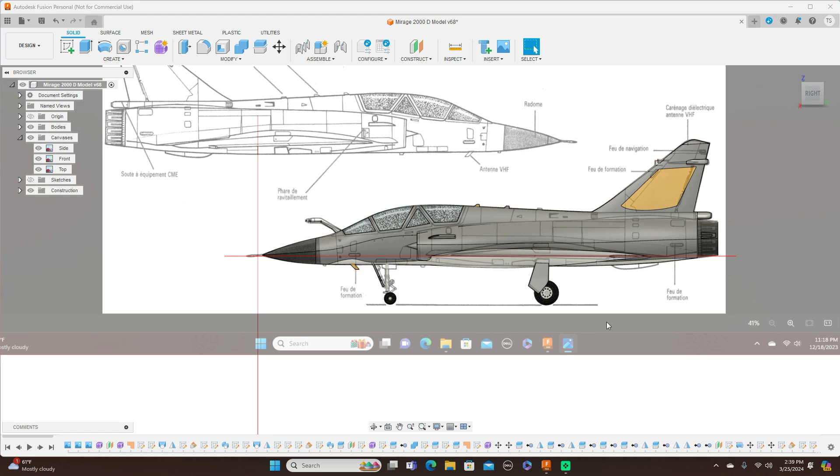Today we're going to look at modeling this Mirage 2000. So we'll have a quick look at her. Go ahead and turn the canvases off. This is what she looks like.

Yeah, the top view there. Front view.

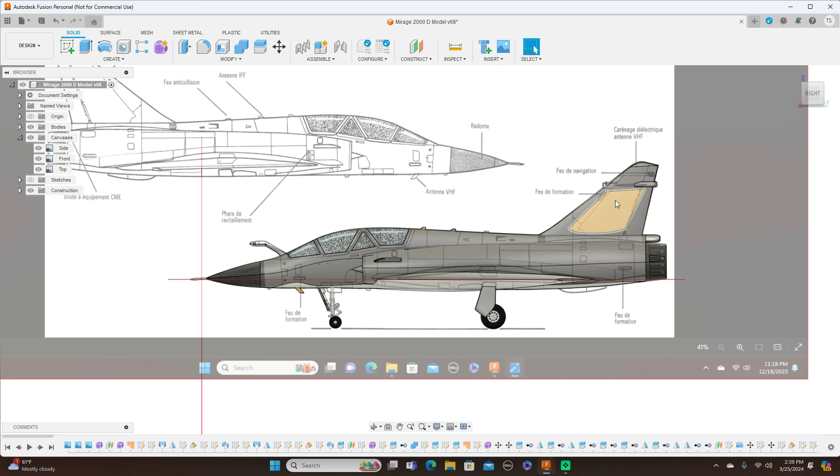All right, let's go ahead and get started here. Come up here, new design, and I'm going to bring in some pictures here of the Mirage.

Come up to insert, canvas, insert from my computer, and it's this one here. So I click this and open, and this is going to be the side. So I click on this plane here. I drag this out, and this is going to be the side view. And click OK.

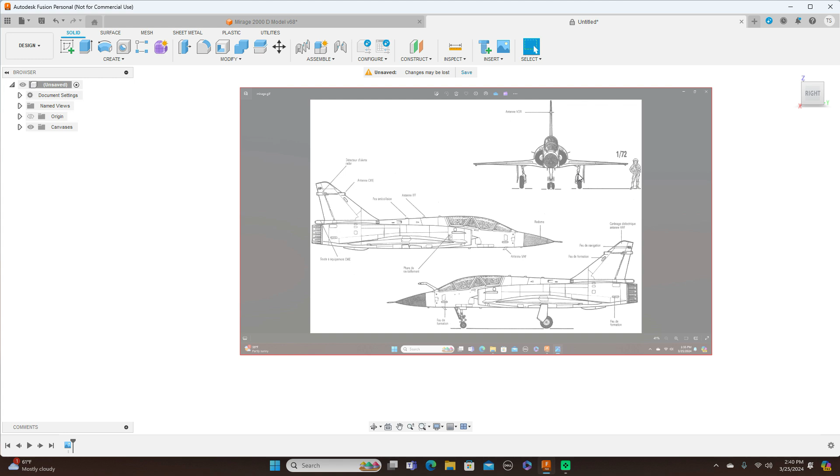Next, I'm going to bring in a top view. Well, let me do one thing first. I'm going to just go ahead and calibrate this to scale it and center it up, then bring in the next one. So come over here. I'm going to change the name of this to side.

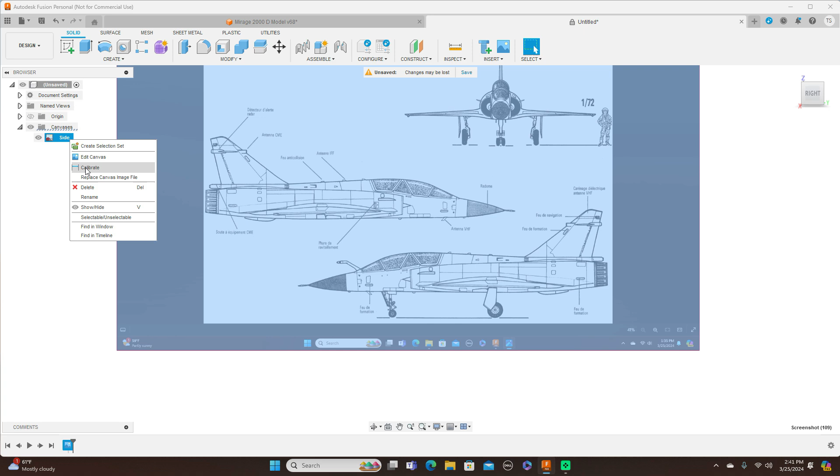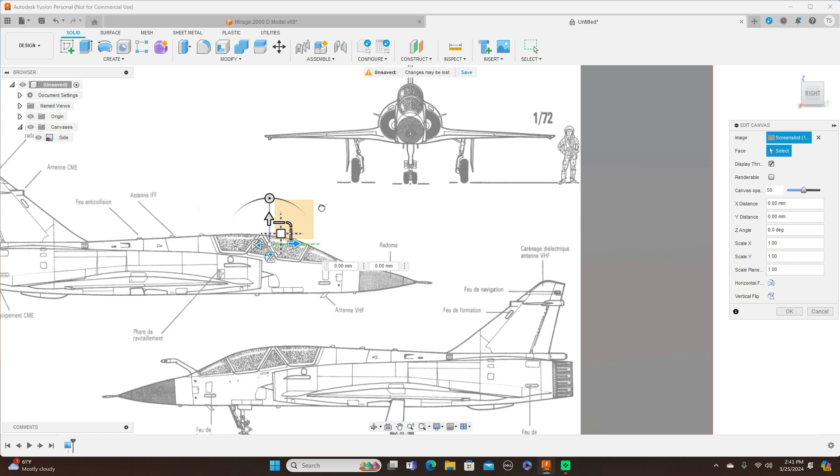Right click this and click calibrate. What I'm going to do is click here to here and make this 2000 millimeters. And use center wheel to scroll in. Right click on this again and edit canvas. Turn the origin on. I'm going to line this up to the origin, the front of this. Okay, and click OK over here.

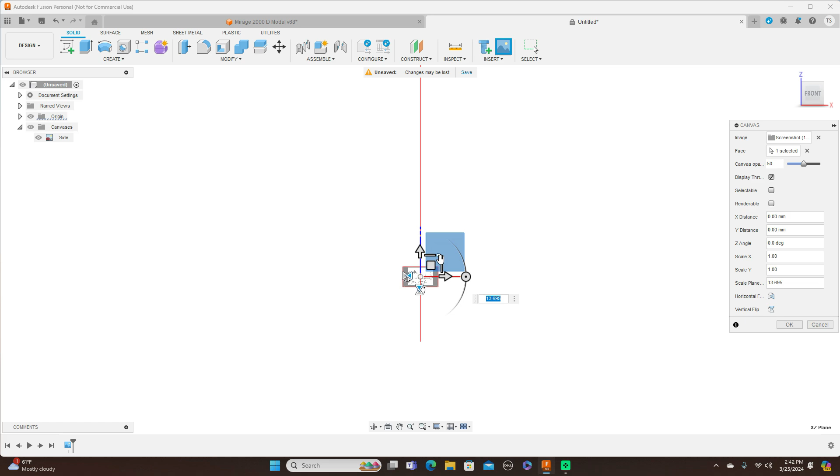And do the same thing for the front. Insert, canvas, insert from my computer. Click this picture here, open, and I want to put this on a front plane. So I'll click the front plane here, scroll out to make the picture bigger. And click OK. And come over here and change this to front.

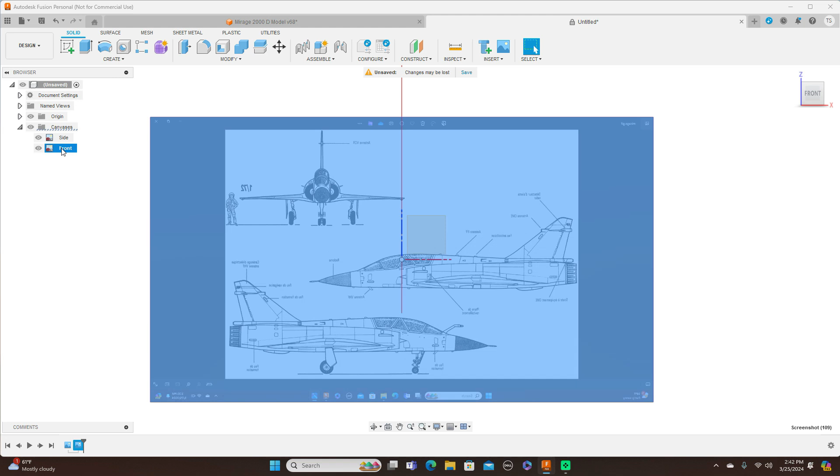Right click and click calibrate. The same thing we did with the other picture, the side view. Click here, back here, and make this 2000. Now, since this is a front view, I want to put this nose here down to here.

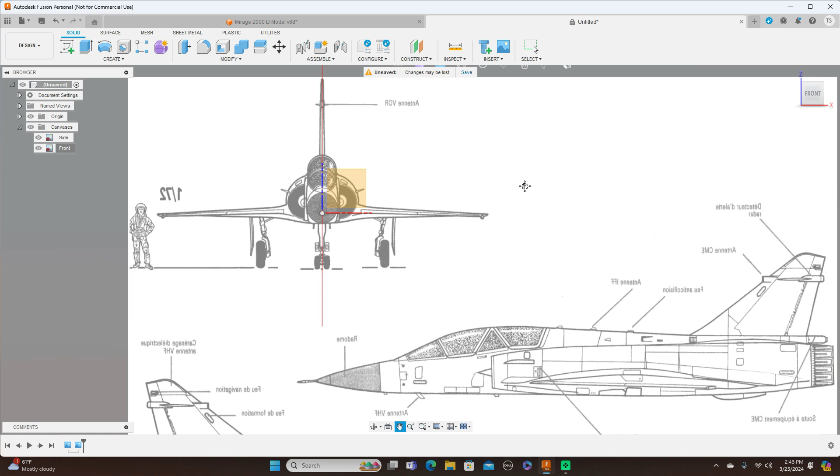So we come up here at the front, right click, and edit. Then I can move this down. And then put this right in the center here. And click OK. Now we have the front and the side. And I just need to put in one more picture, which would be the top.

So now, again, up here to insert, canvas, insert from my computer. And this is a picture that I have a top view of. Open this, click this plane here, the top plane. Drag this out to make the picture bigger. And click OK.

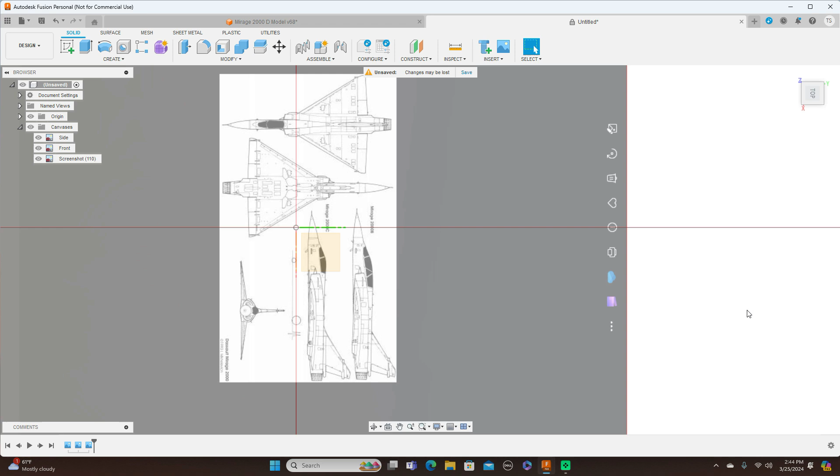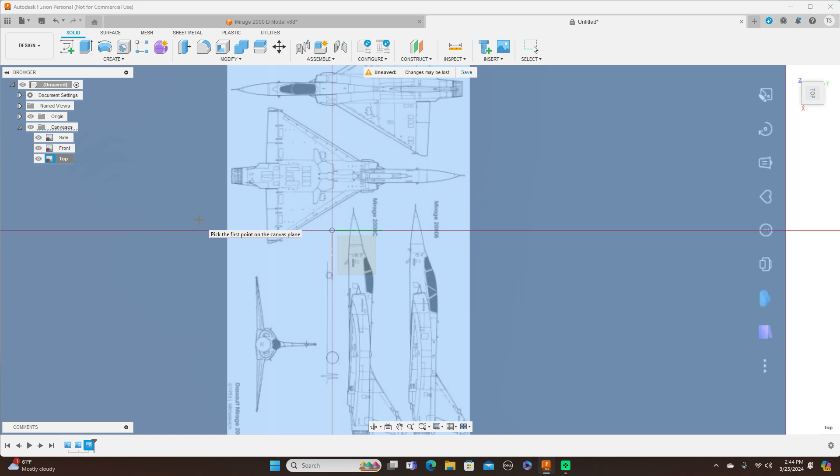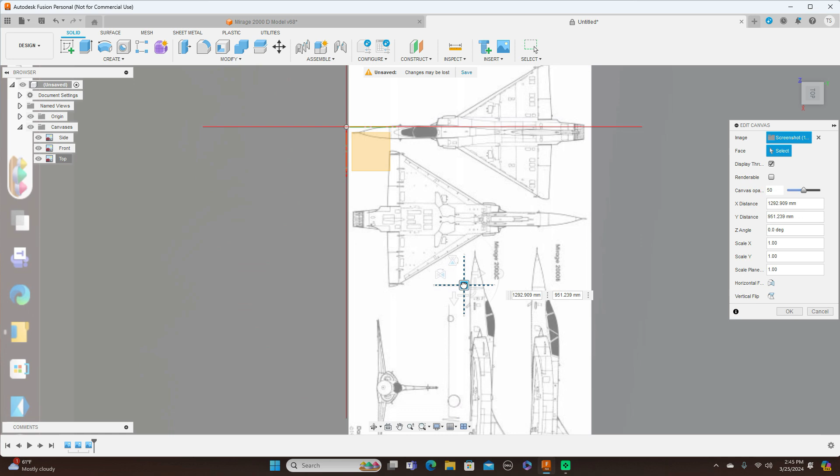Over here on the canvas, change this to top. Then right click on the top, calibrate. And I'm going to click here to back here. And this is going to be 2000 as well. Come over here, right click, edit canvas. And I'm going to move this right here down to the center. And click OK.

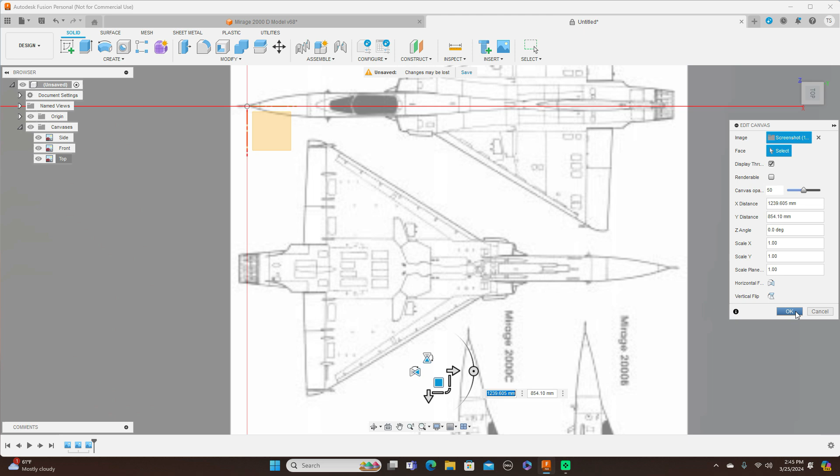Now we have all our pictures in. The side, front, and top. Now come over here to save. Click Save. And I'm going to name this Mirage, Mirage class. And save.

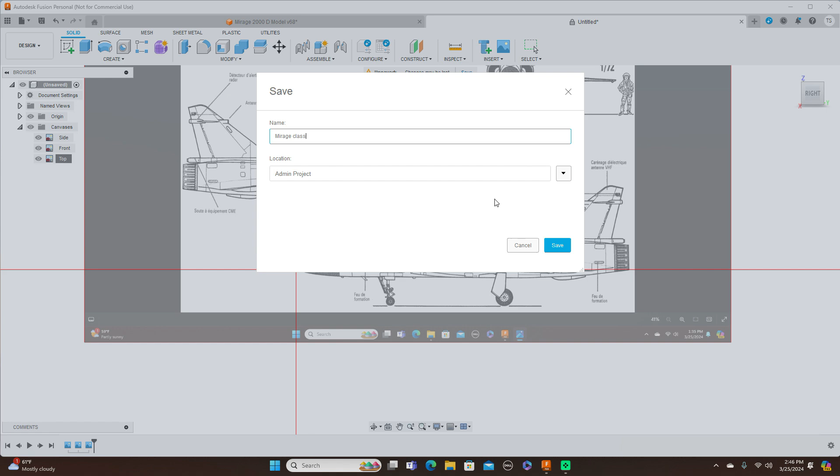Now that we have our pictures in, what I'm going to do here, come to the front. And I'm going to model the center section first here. So come up here. And I'm going to use a cylinder for this. You could use a box to do it too, but I'm just going to use a cylinder.

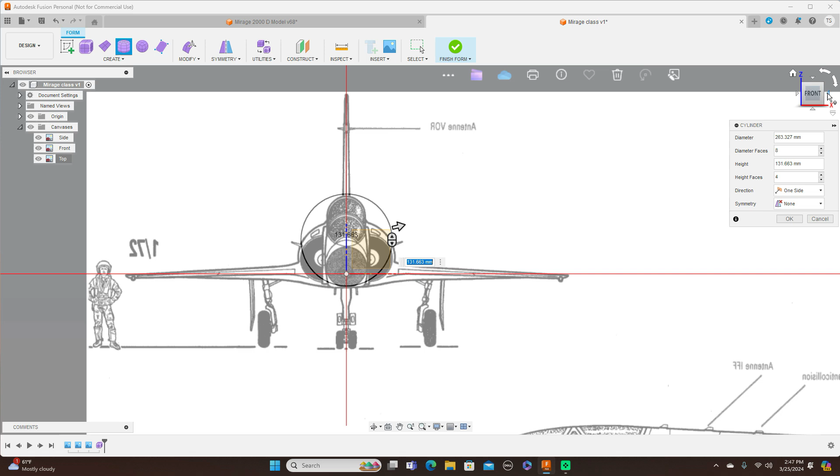Click on this plane here. Now what I'm going to do here is just imagine the center point between from here to here, and click on that. It looks to be about right there. Drag this out. Now I'll turn this around to the side view and drag this all the way back. And add height faces here. I'm going to put 8. And then click OK.

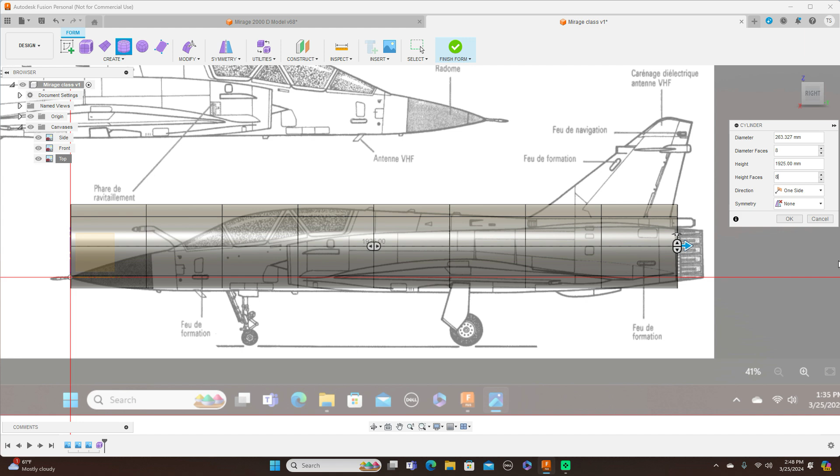And I'm going to left click and select this whole cylinder, then right click, and I'm going to move copy. I'm going to move it down just a little, the whole cylinder. And click OK. Then I start the process of modeling this.

And I'm going to do this to all of these lines here. What I'm doing here is just double clicking, left clicking here to select the complete thing around. And then I drag this to move it down.

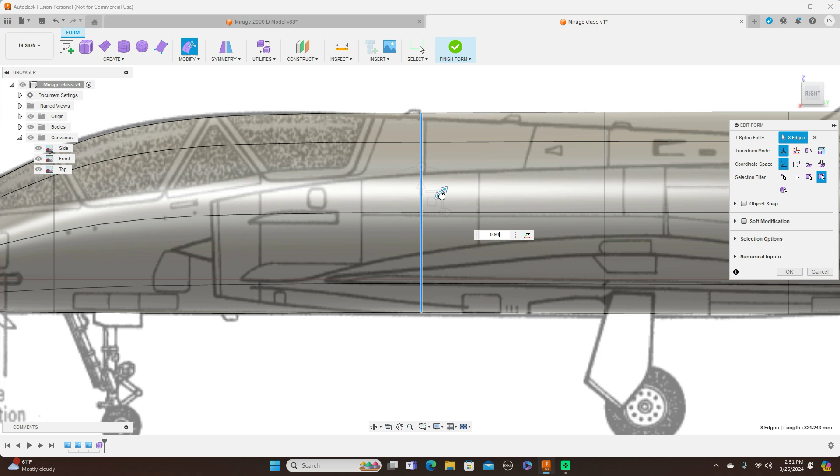This Mirage model here is not a difficult model or jet to model. This is done pretty much like the Havoc jet I showed you guys how to model, and the Rebel jet, how to model that too. It's two forms. But this just happens to be a scale jet, versus the Rebel and the Havoc, which are not scale jets.

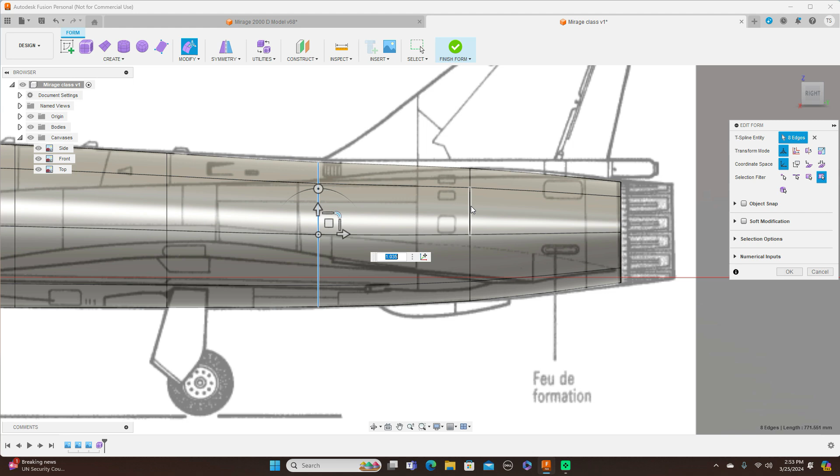Some people have asked why I show you guys how to insert the pictures in each of my videos when I should just show it one time. But the reason I do that is because some people are new to the channel altogether, and they want to see one particular jet and how it's modeled, and they haven't watched any other of my videos. So they can just watch the one video and see how I insert the pictures on the canvases, and they're good to go. That's why I do that, for other people who are just new to the channel watching the video.

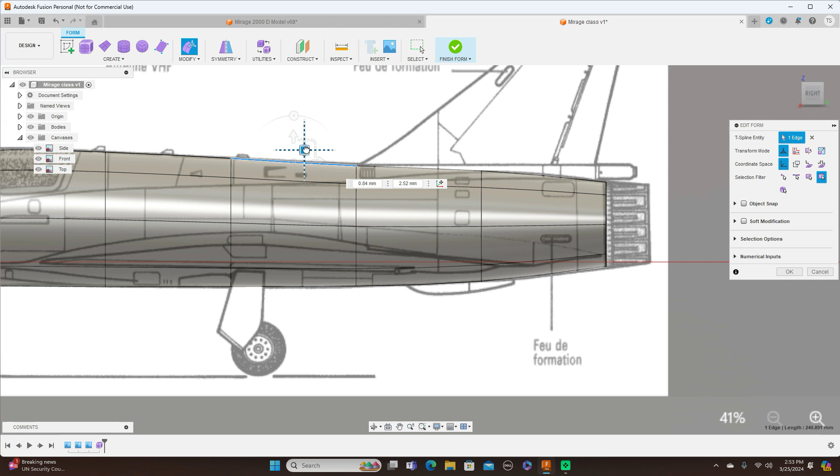And as you see this time, I'm pulling these dots here as well to get a really good shape of this. Now look at the top here, and I'm going to do the same thing I did to the side.

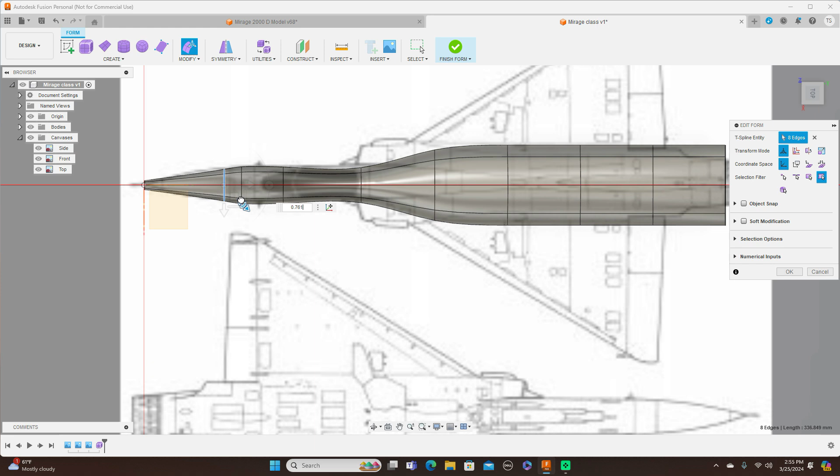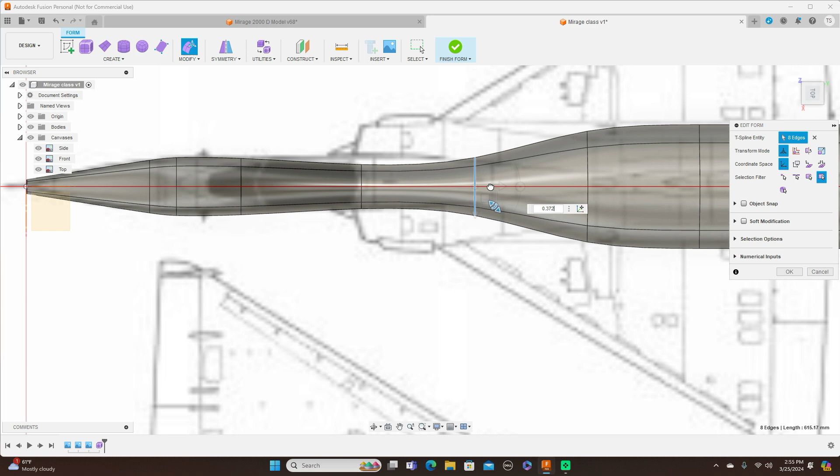I like this Mirage jet. It's one of my favorite jets as well. That's a Delta Wing jet.

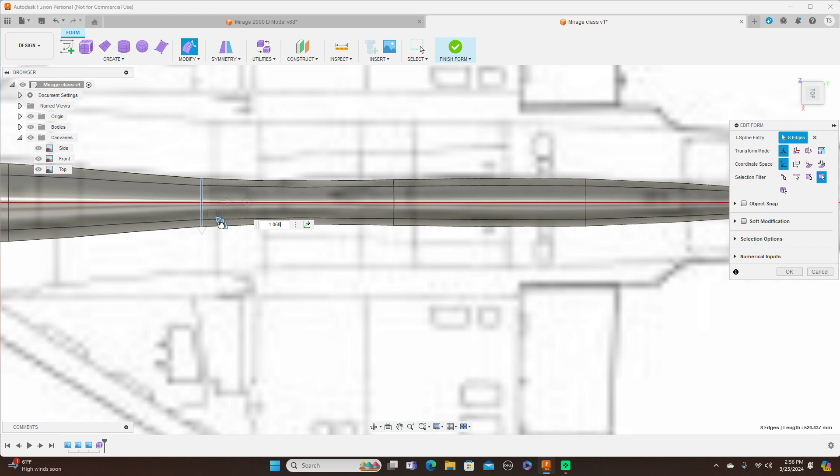So far, as you can see, this is not a very difficult model here. It's just time. And pretty much as I'm doing here, the rest of the jet will be modeled pretty much the same way.

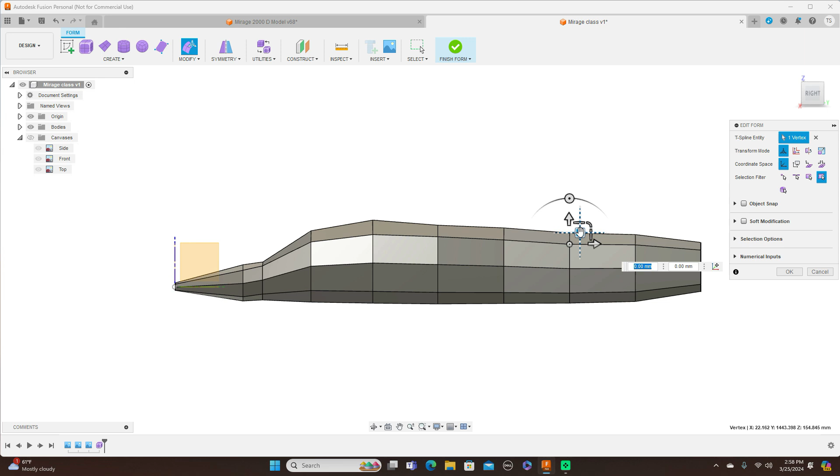Hey, you guys wonder how I did that, from box mode back to this normal mode. That's just Alt 1 to turn that on, and then Alt 3 to turn it off.

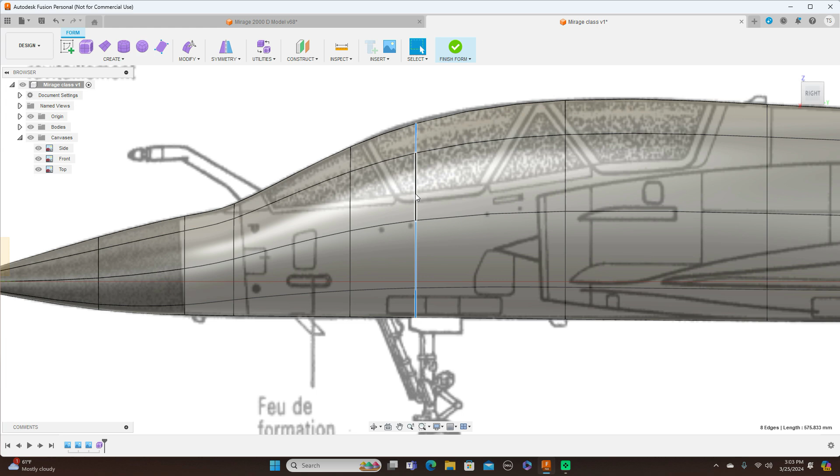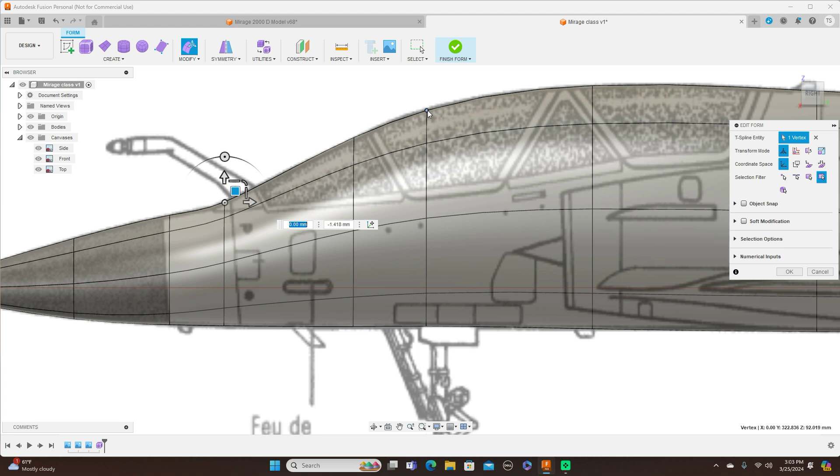I'm going to put another line in here and raise this up just a hair. And I'm going to put another line right here and raise this up a little too.

Left double click here. Modify, insert edge. Then move it over here.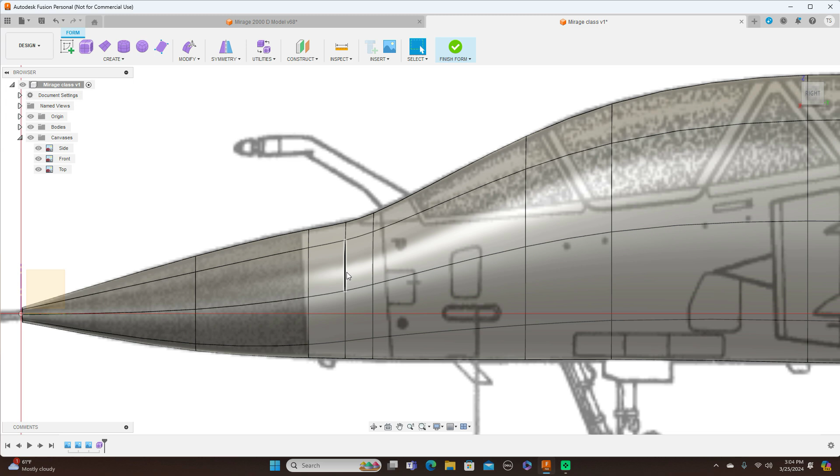All right, that's much better.

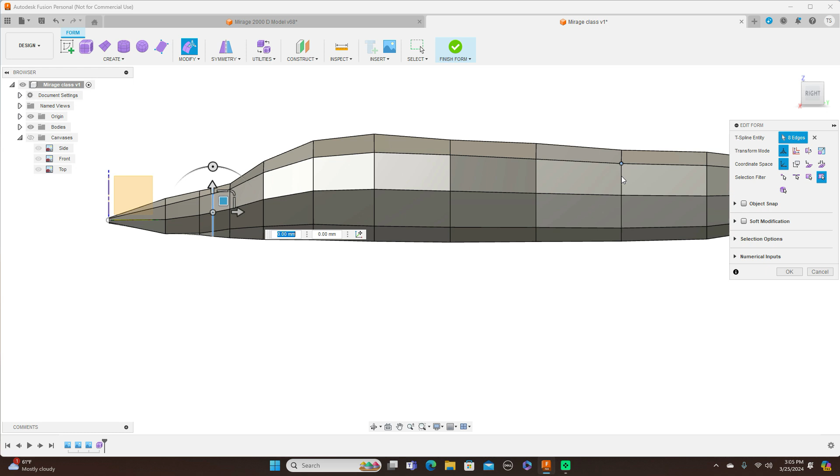Now, when I'm switched to this box mode here, what I'm doing is looking to make sure everything is straight and symmetric. Right here, I want this to come up a little, because I want the line to be straighter.

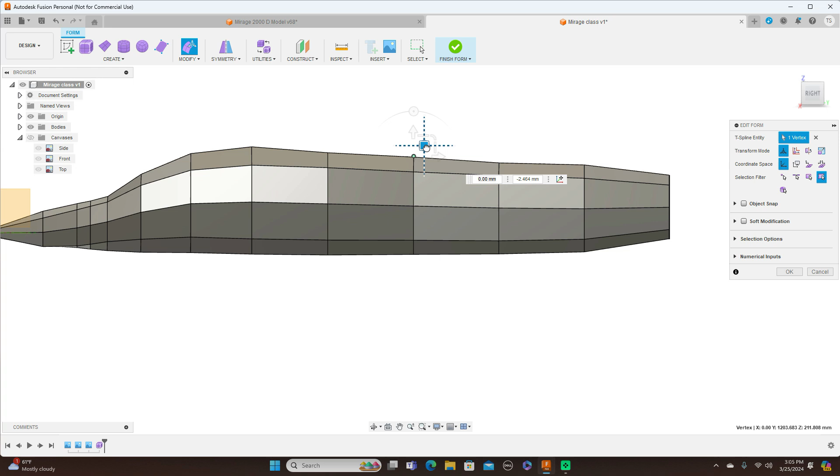And again, that was Alt 1 to turn it on and Alt 3 to turn it off. And click OK here.

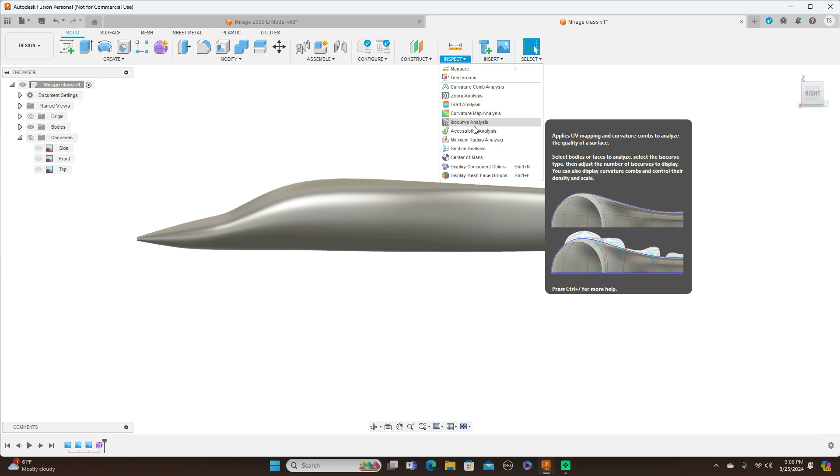And let's have a good look at this. Use Control 4 to turn off the lines, and turn off the origin here. I'm going to have a look at this. Well, I'm going to finish form here first, and then I'm going to have a look at this in the zebra analysis.

Okay, now this is looking really good. Right here, this section needs just a little work on it, but not much, as we can see. I'll just go ahead and click OK because I want to look at it again in the future. Now, if you don't want to look at this again, you can just click cancel and cancel this altogether. But again, I'll just click OK so I can look at it again.

Then it comes over here under the tree, and I can turn it off and on from over here.

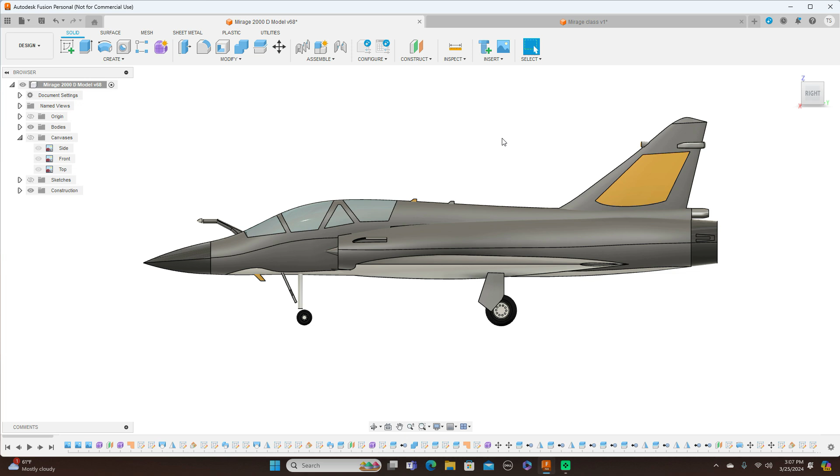Now, I use all these tools to make the model look really good. Like looking at it here, as you can see, when you turn on the canvases, this follows this jet here really well. And that's what I use - I use all these other tools to make sure that it's exactly following the pictures and models that I use.

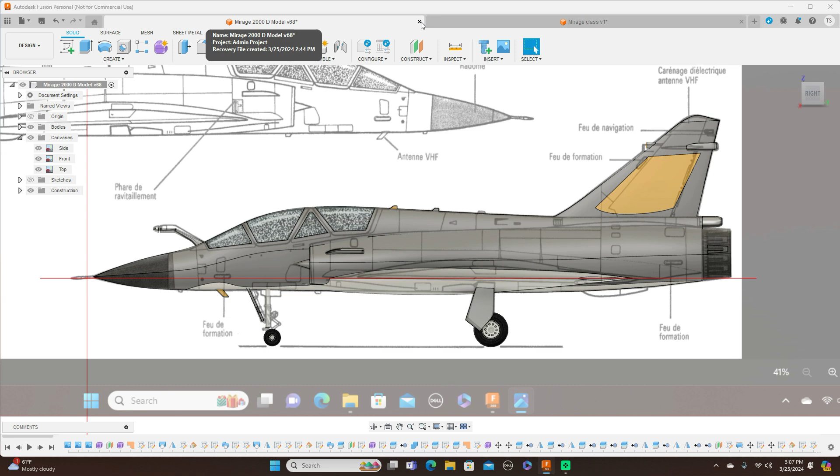And that's what it looks like from the top. Now right here, it's still not a smooth transition to me, so I'm going to put another line probably right there, another edge.

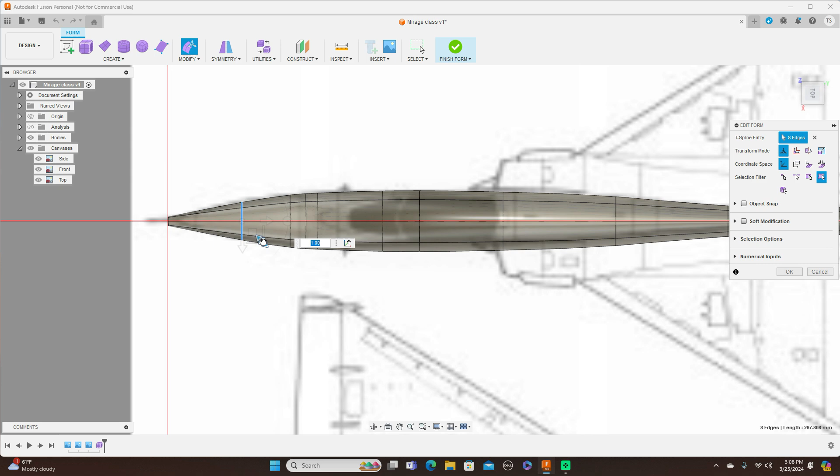Come down to here, right click and edit. But we have a line there already, so I'll just edit this line here. So I'm going to double left click, right click, and edit form, and click OK and finish form.

Now that looks a lot better. And as you can see from our picture, this looks really good. The more time you spend with it making sure things are correct, the better the model looks.

Okay, now I'm going to come up here, click Save, and click OK.

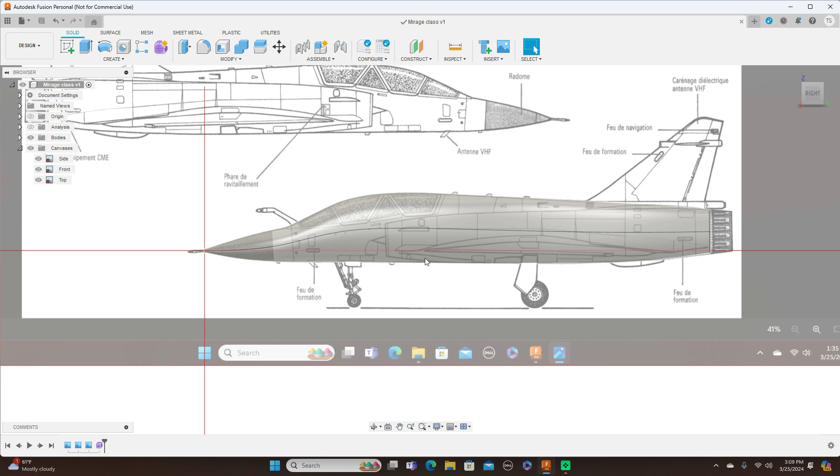Now I'm going to make the intake section here. So what I'm going to do is turn the origin back on, come up here to Construct, and I want to do an offset plane. The offset plane I want to offset is from here, from this plane, and I'll move this back.

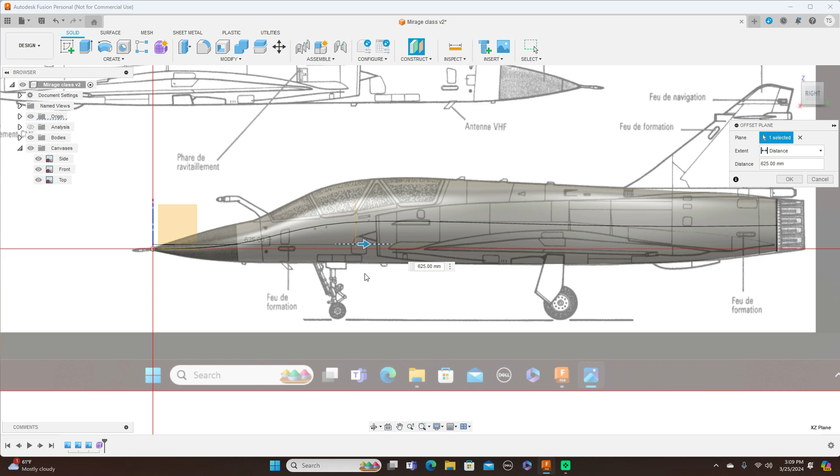There are a couple of ways you can do this, and I think what I should do is do this from the front of the intake instead of the back, because I don't have a back picture of the intake area here, or excuse me, the exhaust area back here.

So what I'll do is move this construction plane to here, to the intake, the front intake, and click OK.

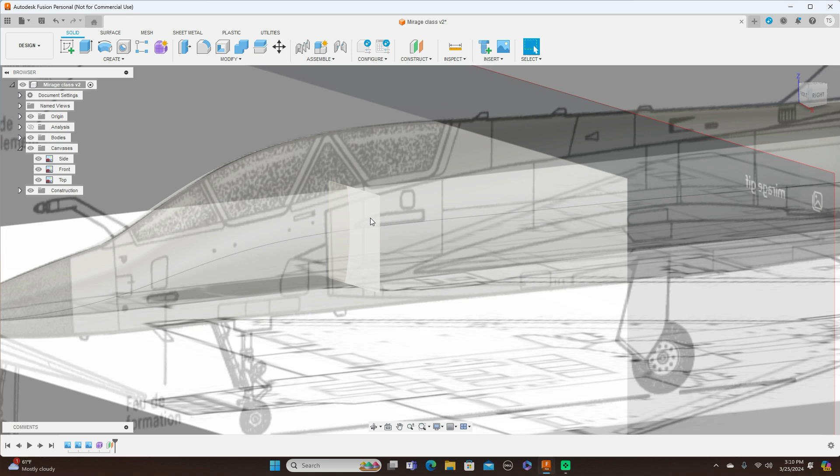Turn this slightly right so I can see this plane here, and I want to draw on this plane here. So I'll come up here to Create Form, and I'm going to use a cylinder again, and I'm going to use this plane here.

Now I'm going to imagine halfway between here and here. Now, you don't have to use a cylinder. You could use the blocks and other things, whatever you feel comfortable modeling with.

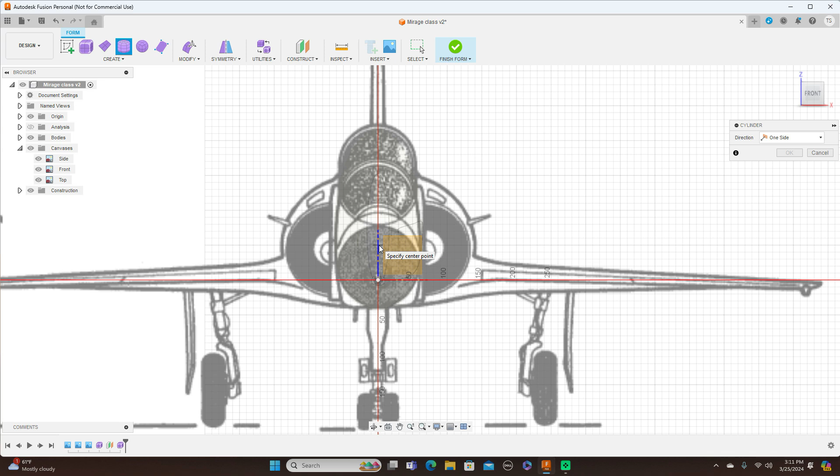And drag this all the way back. And I'm going to add some more height faces. And click OK.

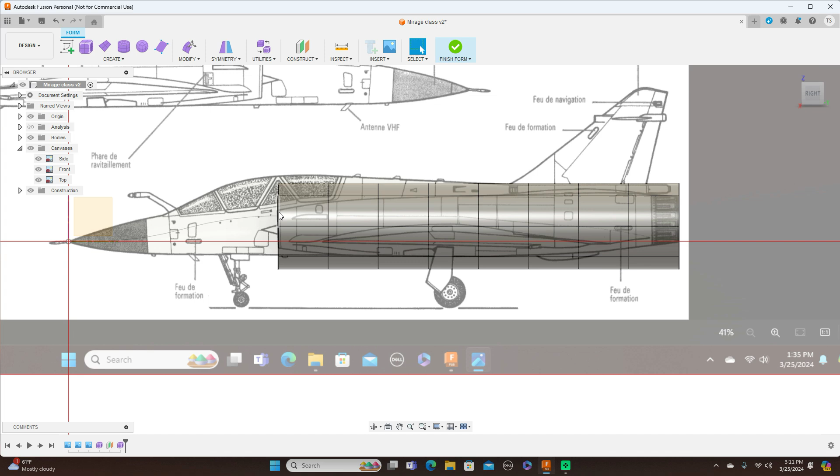And we go through the same process like we did with the other body.

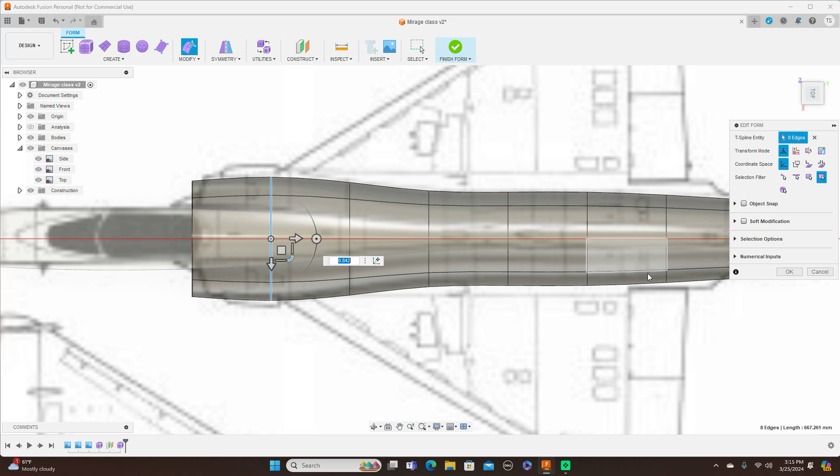Now look at this from the back. Okay, that back is a circle like I want it. And the front, it's the oval like I want it.

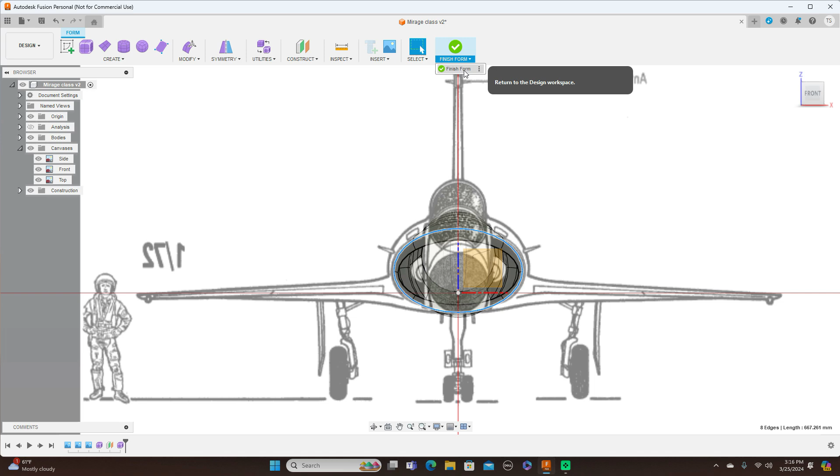Now come over here, click OK and finish form, and let's have a look at what we have so far. Turn off the canvases, okay, and turn off the origin. And this is what we have.

And that is looking really good. Turn off that line, which is Control 4. And I'll come over here to Analysis, have another look. There we go.

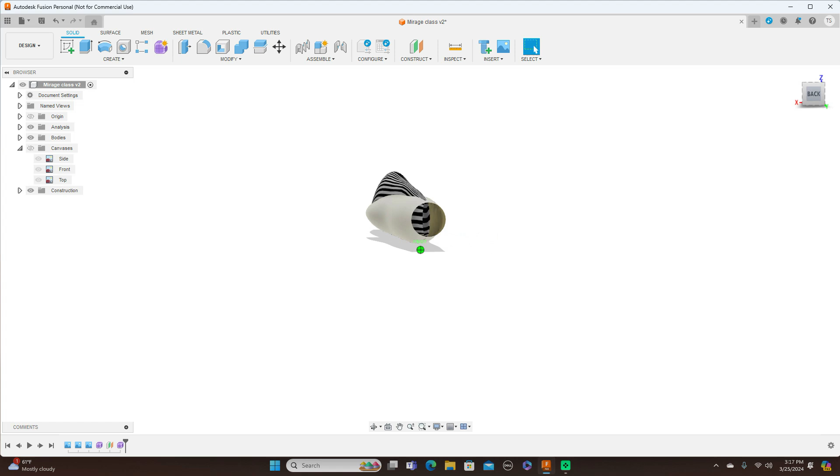Okay, turn the canvases back on here. So now this is matching really well. And it could even get even more scale and better looking too if I just spent more time in here doing this.

But these two bodies here, these two, in my opinion, are the hardest things about this model. And as you can see, it's not that difficult to do, to put these two in here. And so, yeah.

And now I'm going to put this vertical fin here in here. Let me turn Analysis off.

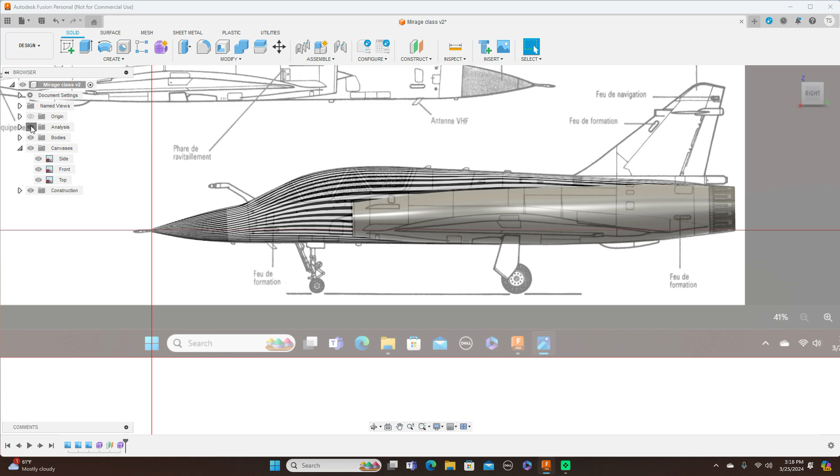Okay, to do that, what I'm going to do is click up here, Create Sketch on this plane here. I'm going to use the Line tool, the letter L for line.

Now, if you're new to Fusion and you want to learn Fusion fast, I recommend knowing where the commands are that you want to use. The shortcuts are really great tools to use, and once you get real proficient in using Fusion, then I would suggest using the shortcut keys a lot, or hotkeys.

So like if you want the line tool, for instance, you come up here to Create, and you see the line tool up here, and it tells you the hotkey for it also, which is L. And you see all these others up here too, like conic, curve, spline, slot, ellipse, etc. So each time you come up here for this line, you get to see these other commands up here too, and this helps you learn where these commands are as well.

So if they have a hotkey for it already, you'll see that too, L. So, yeah, like I said in the beginning, I would just suggest coming up here and using the drop-down menu and finding it here, and then clicking that. And so let's get back to modeling this.

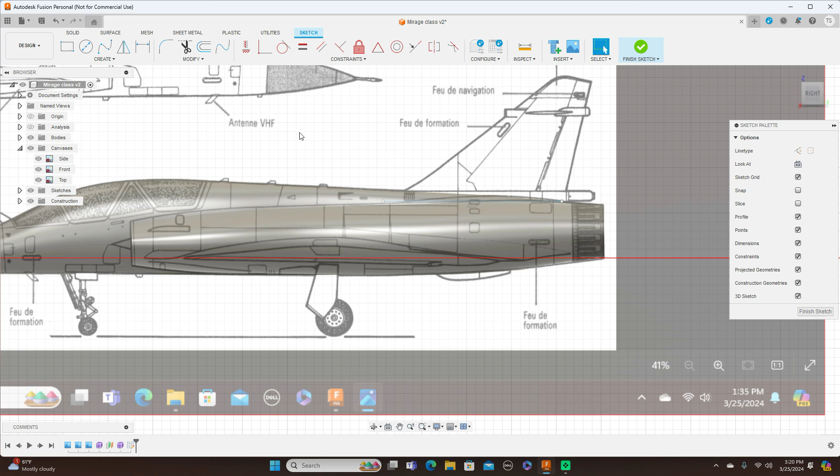Okay, now finish sketch here, and I'm going to use a plane at an angle. I'll come up to construct and click on plane at an angle, and use this line. This should be 0 degrees, which it is, and click OK.

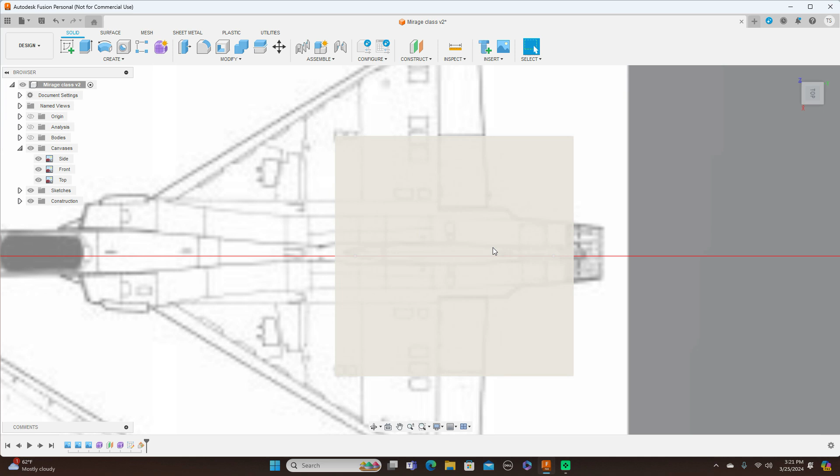Now we have our plane there. I don't have an airfoil for this, so I'm just going to follow what they have here. I'll click this plane, come up to create sketch, and use a fit point spline.

And draw a line. I'm going to use the shortcut hotkey here, L for line. Click OK. Then I want to mirror this line over to the other side, so I'll come up here to mirror.

This is for mirror. If you didn't know that, to mirror you just click create, come down here, and use that mirror tool. Like I said in the beginning, it's best to do that so you can see all these other commands and stuff that you can use.

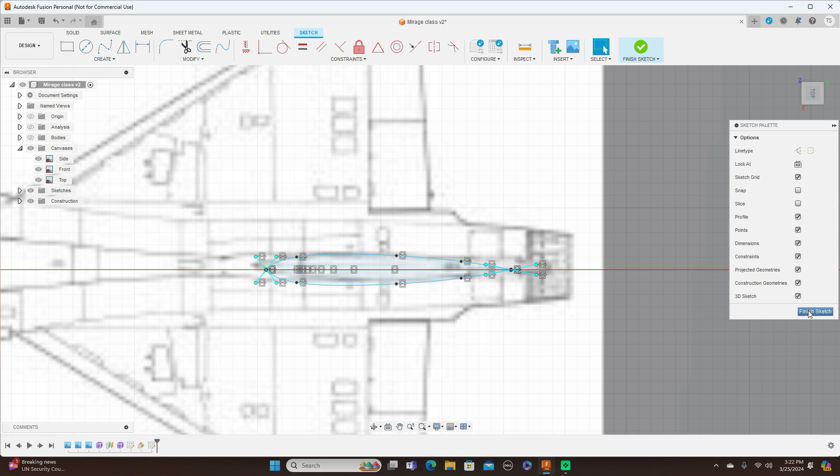Now I want to create a sketch on this plane here, and I want to project this center line onto that plane. So the letter P for project. Again, if you didn't know that P was for project, you come over here to create, and there's your project right there.

And I want to project that center line, and click OK.

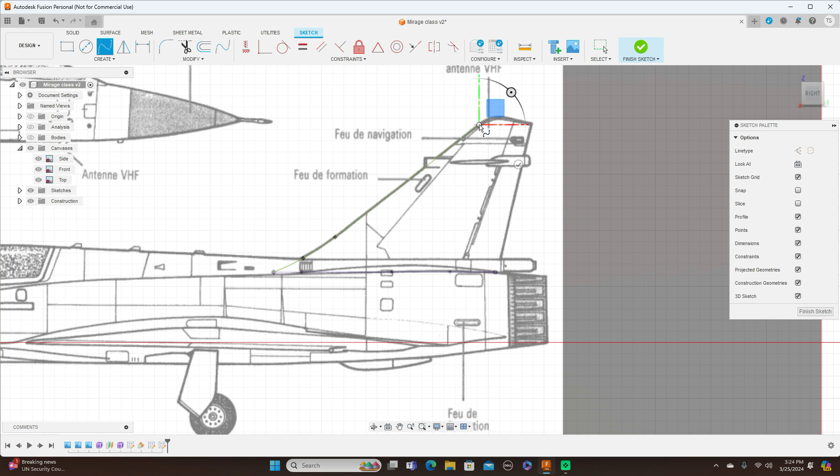Use the line. Actually, I'm going to use a spline, as there's a little curve here. And the back one, I'm going to use a line. And finish sketch.

Then I'm going to come over here to create and use a sweep, and select that profile. But first I want to change this to path plus guide rail, and change this extent to full extent.

Now for profile, select the other profile also. The path is going to be this, and the guide rail is going to be this. Go ahead and click OK.

Now we turn our bodies back on, and this is what we have. We turn the canvases off, and the sketches too. And this is our Mirage so far, and that's looking really good.

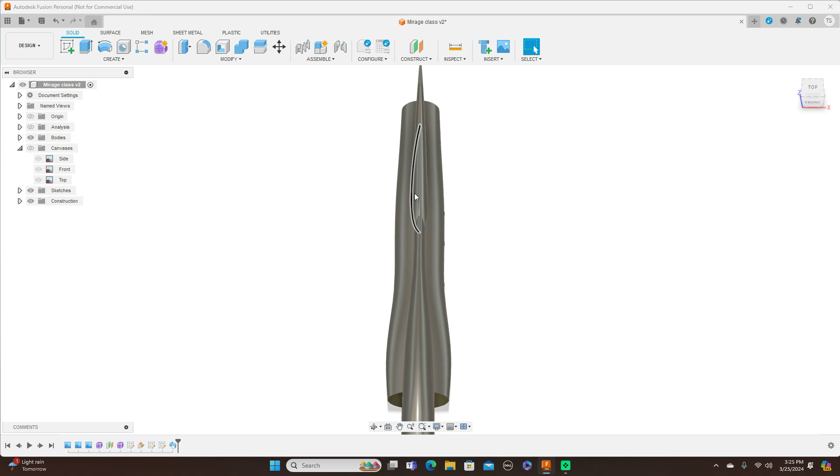What I'm going to do is probably go in here and edit the sketch. Turn the sketches back on. That shape that I drew here, I'm probably going to come back and edit it. It's just a little too wide, I don't like that.

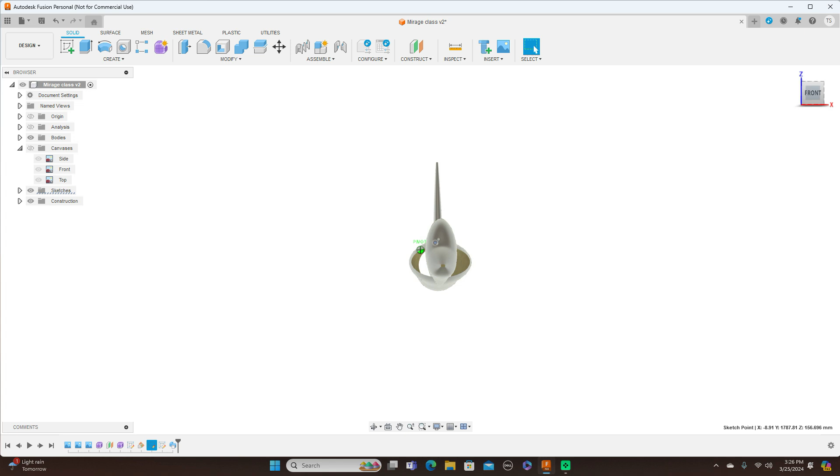Still a little too wide, but I'll go back and narrow it down even more. But actually it's about the right size now, so I might just leave it alone. This is what we have so far, and it's actually looking really good.

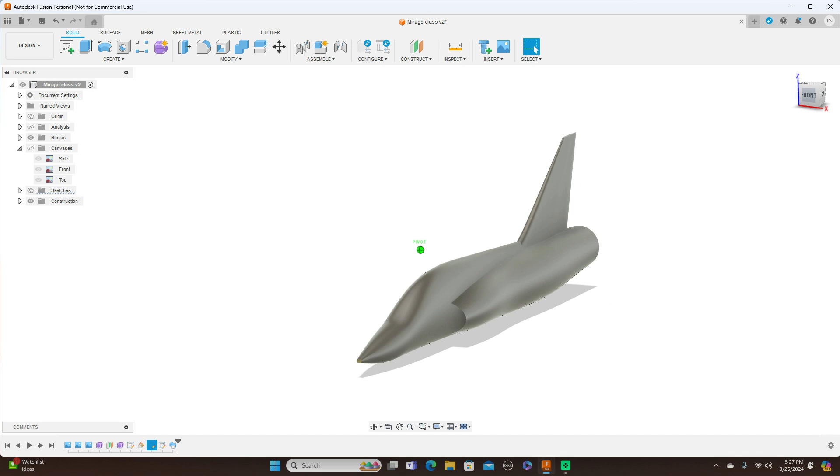That's it for now with this particular jet. I don't want to take a lot more time because this video is running a little longer. But as you can see, just by taking our time here, we come up with a very nice model so far. So that's going to wrap it up for this video.